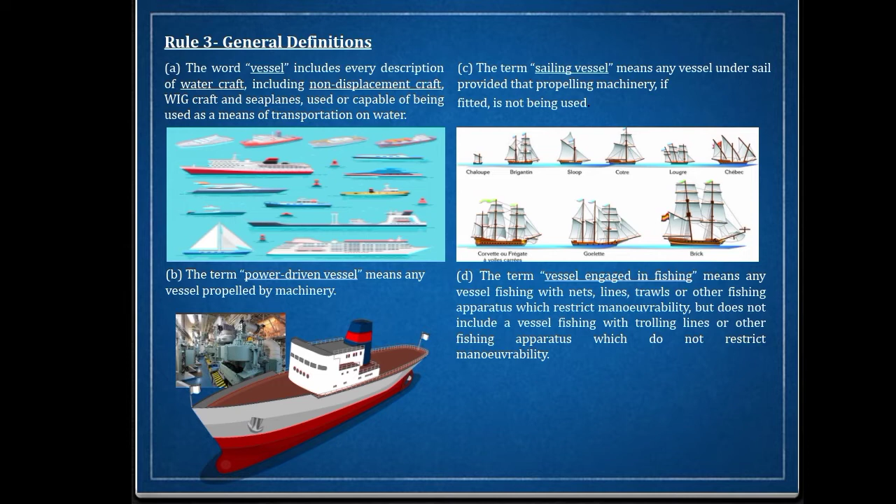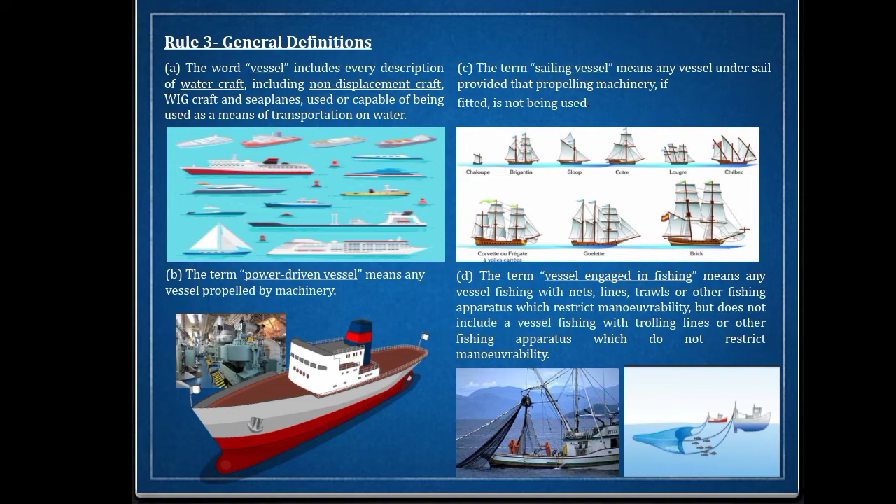The term vessel engaged in fishing means any vessel fishing with nets, lines, trawls, or other fishing apparatus which restrict maneuverability, but does not include a vessel fishing with trolling lines or other fishing apparatus which do not restrict maneuverability. So when we say vessel engaged in fishing, any kind of vessel with nets, lines, or trawls, and other fishing apparatus is considered a fishing vessel, or engaged in fishing.

Seaplane - the word seaplane includes any aircraft designed to maneuver on the water. This is an example of a seaplane. They can maneuver in the air and at the same time maneuver on the water, or they can land on the water. So this is dual purpose - we call this an amphibious aircraft, like amphibious animals.

Next, the term vessel not under command means a vessel which, through some exceptional circumstance, is unable to maneuver as required by these rules and is therefore unable to keep out of the way of another vessel. They are restricted and unable to maneuver because of some circumstances.

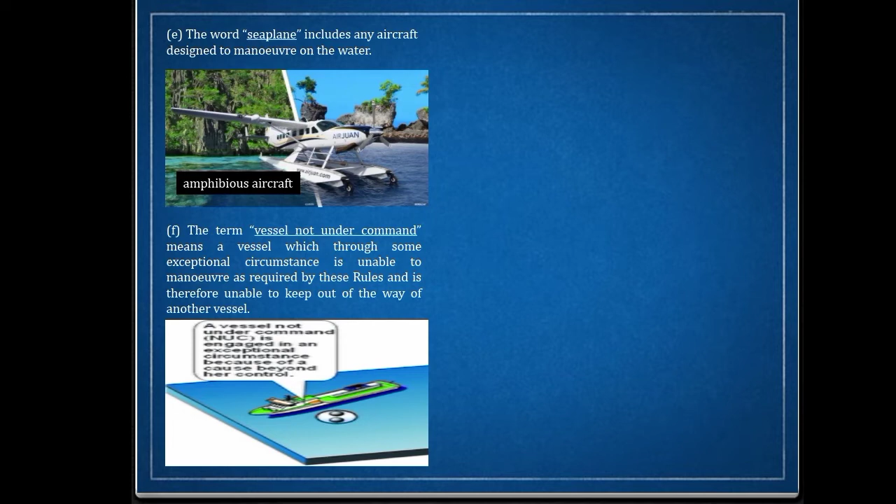Here are some reasons: first, a breakdown of engines or steering gear - why this vessel is not under command because of breakdown of engines and steering gear. Secondly is the loss of the propeller or the rudder. Next is a sailing vessel becalmed, as long as she does not have an engine. Next, a vessel with her anchor down but not holding. And lastly, exceptional weather conditions - we emphasize here the importance of the adjective.

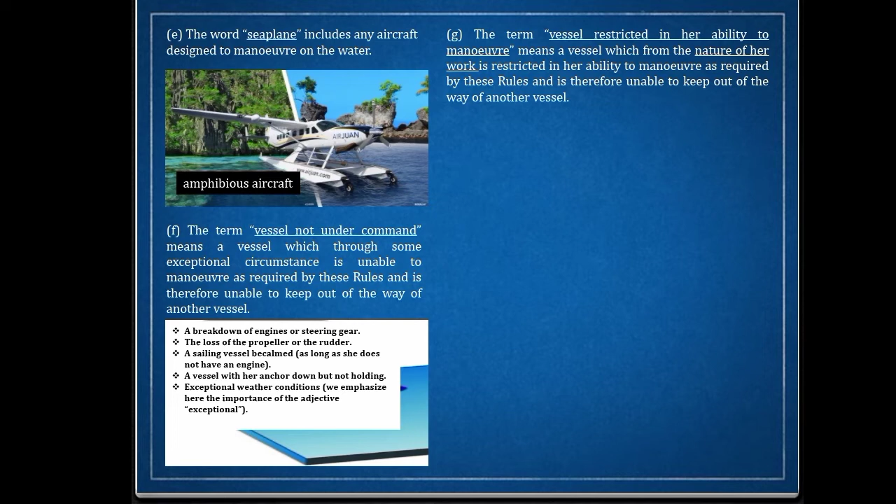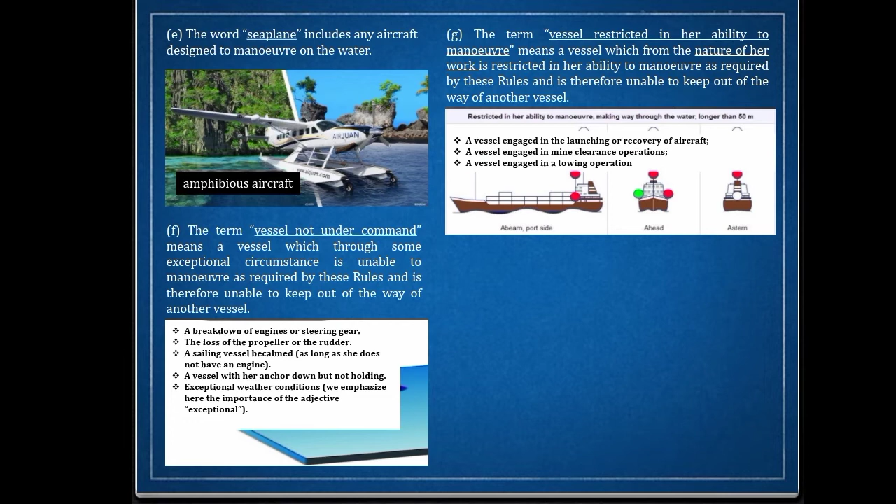The term vessel restricted in her ability to maneuver means a vessel which, from the nature of her work, is restricted in her ability to maneuver as required by these rules and is therefore unable to keep out of the way of another vessel. So what does vessel restricted in her ability to maneuver mean? They are restricted maybe because of the nature of their work. That is one of the reasons why the vessel is restricted in her ability to maneuver. As you can see, there are lights there - it is applicable at nighttime, and shapes for daytime.

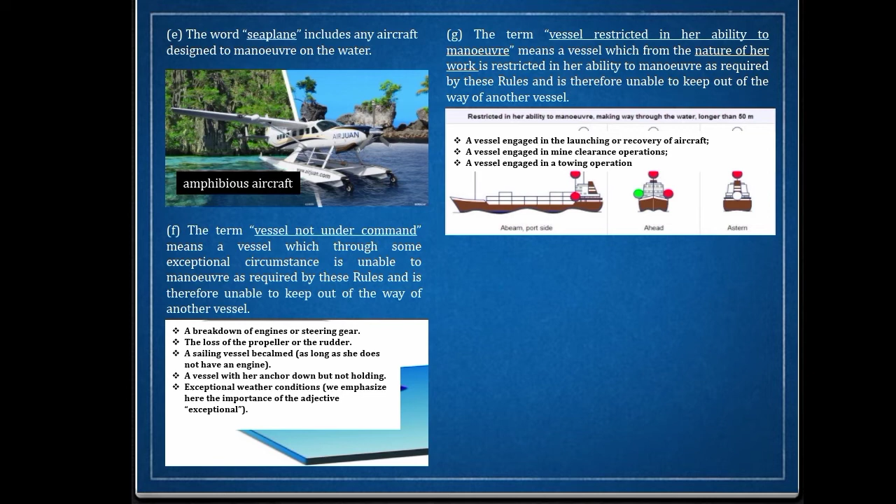Here are some reasons why a vessel is restricted in her ability to maneuver: first, a vessel engaged in the launching or recovery of aircraft. Secondly, a vessel engaged in mine clearance operations. And lastly, a vessel engaged in a towing operation.

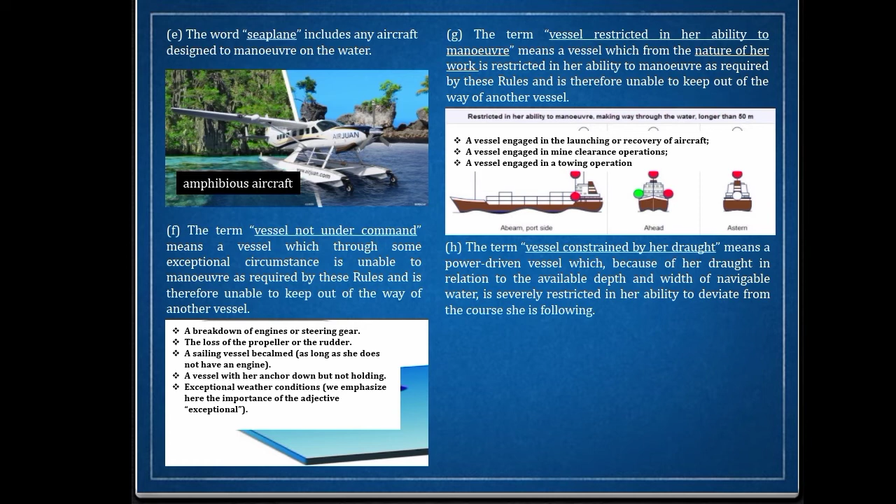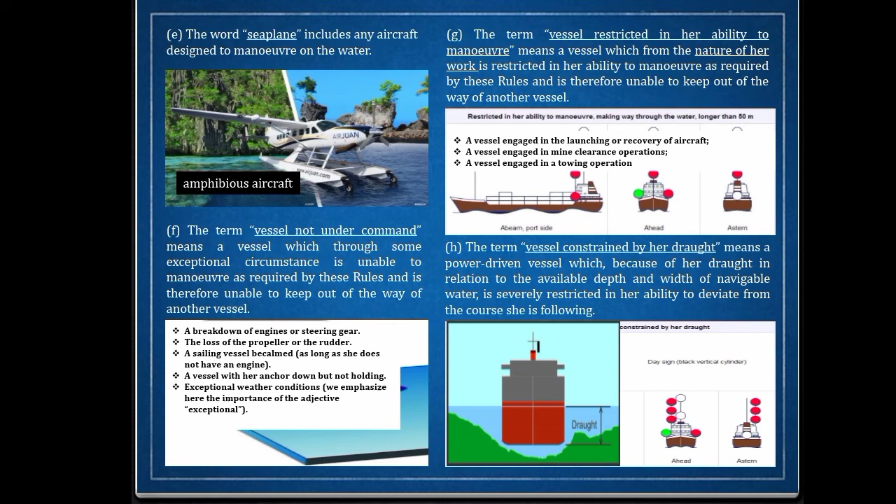Next, the term vessel constrained by her draft means a power-driven vessel which, because of her draft in relation to the available depth and width of navigable water, is severely restricted in her ability to deviate from the course she is following. So here it is - vessel constrained by her draft. It's like she's trapped, the depth of water is like she's in a shallow area, so she's restricted in her ability to maneuver.

Next, the word underway - what does it mean? It means that a vessel is not at anchor or made fast to the shore or aground. So it means moving through the water, or in Filipino so we can understand more easily, the vessel is sailing.

Next, the words length and breadth of a vessel mean her length overall and greatest breadth. So we have LOA, or length overall, LPP, length between perpendiculars, and some ship sizes. This is still under seamanship.

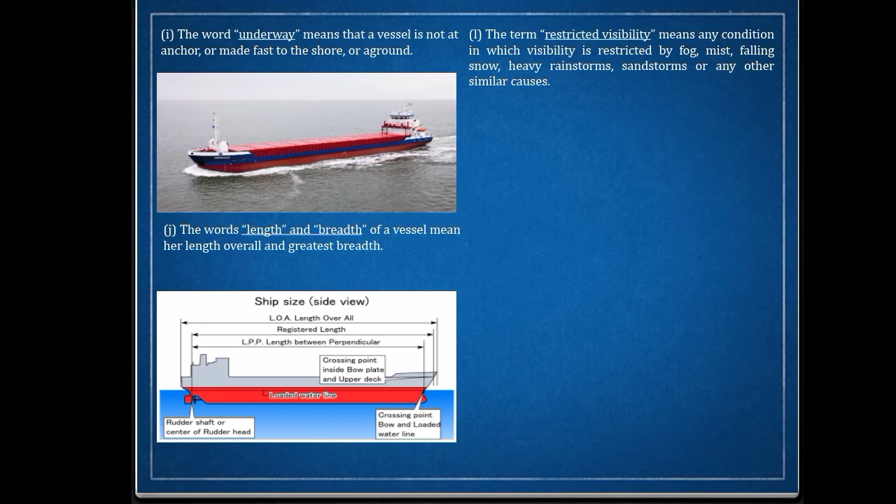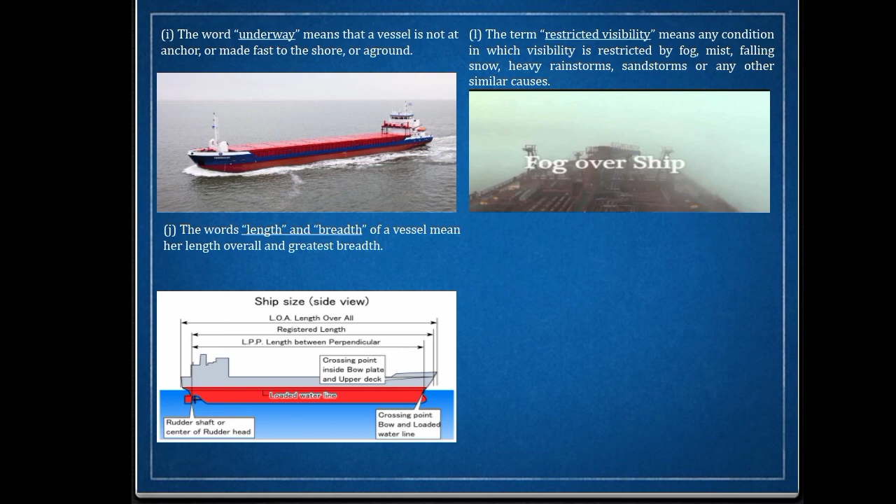Next, the term restricted visibility means any condition in which visibility is restricted by fog, mist, falling snow, heavy rainstorms, sandstorms, or any other similar causes. So it means restricted visibility - we cannot sight or see the other vessel on the ocean, as you can see, fog over ship. So it means we cannot see the other vessels or objects in the ocean because of restricted visibility or zero visibility. There are different reasons or causes why we cannot sight or see the other vessels, maybe because of fog, mist, falling snow, heavy rainstorms, sandstorms, or other related or similar causes.

And lastly is the term wing in ground, or WIG craft. This means a multimodal craft which in its main operational mode flies in close proximity to the surface by utilizing surface effect action. So they can actually land on the surface of the water. That's why we call it wing in ground or WIG craft.

Okay, this will be the end of our lesson for this rule number 3. Thank you for listening again and again.